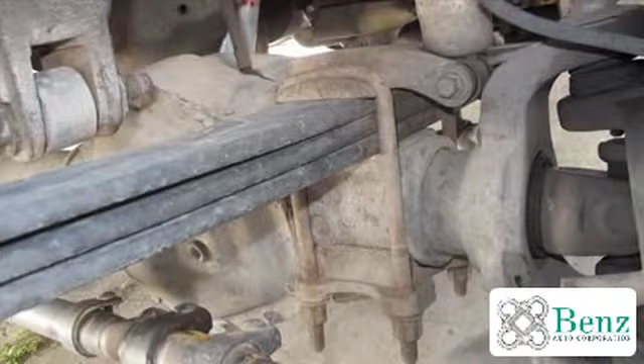Let's put some emphasis on the humble U-bolt, a very important part of the suspension, because if you have a leaf spring suspension, the U-bolts hold your leaf springs onto the differential of your vehicle, and your differential houses the axles which your wheels are bolted to, and they're good mates for tyres, hold you to the road.

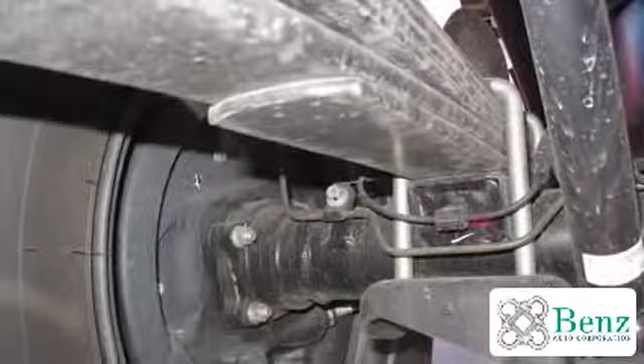Important, aren't they? But when spring repair or replacement is necessary, some people give U-bolts little thought because they are planning to save $1 and just use the old ones, which sounds like a plan until the old U-bolts are seized on and have to be cut off when removing the springs for repairs or replacement.

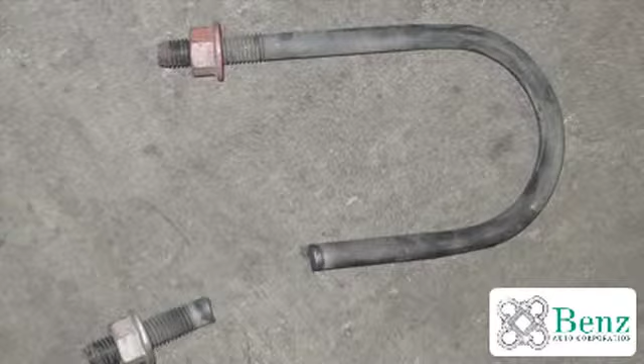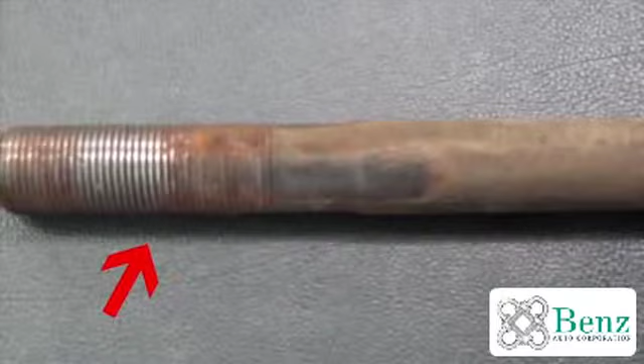The old U-bolts break or snap under the force used to undo the nuts, or the U-bolt threads are damaged when the nuts are removed, and if reused, keeping the nut tight after reassembling cannot be guaranteed, and loose U-bolts will void a new spring warranty.

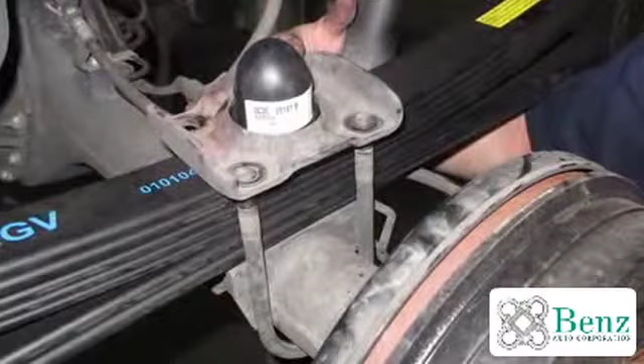Or, oops, forgot that the stronger and therefore thicker leaf spring pack is now being used, so my old U-bolts aren't long enough. Rest assured your disappointment will be amplified if you are doing the job on the weekend when everything is closed, or if you are a long way from the supplier. So to avoid being disappointed by any of these possibilities, let's just say it is a wise practice to replace the U-bolts when a spring removal or replacement has been done.

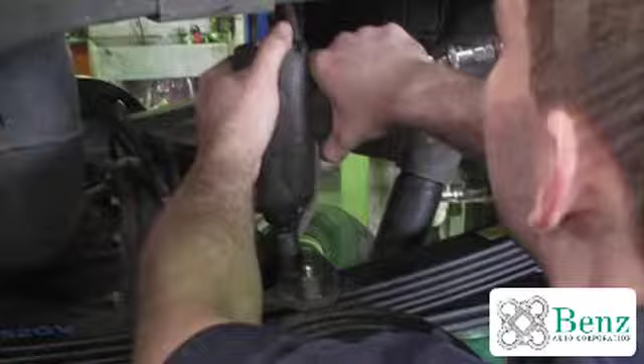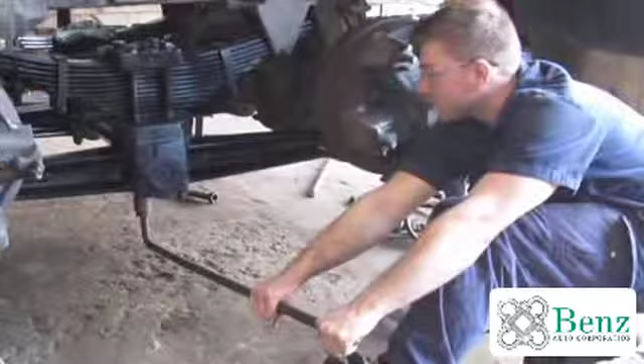It is also recommended that the U-bolts be retensioned 7 to 10 days after installation, as the spring settles into position and any initial stretching of the U-bolt threads has occurred. The retension will ensure the leaf spring remains firmly secured and is not allowed to rock in place, causing unwanted spring flex in the middle of the spring, which can cause leaf breakages to occur.

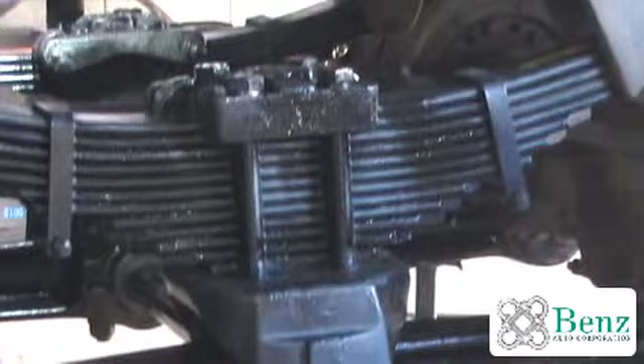Loose U-bolts can also cause a leaf spring to walk out of position, which will damage your centre bolt and affect the alignment of the vehicle. Remember, centre bolts hold the spring together for assembly and help locate the spring onto the axle in the correct position. Correctly tightened U-bolts are what holds the spring firmly in place on the vehicle when driving.

So now that you know why you need to replace the U-bolts, let's have a look at what we need to know about the U-bolt when we are ordering new ones. Most times just supplying the vehicle make, model and year will be enough. Other times the vehicle or spring specifications have changed and you need to describe the physical properties of the U-bolt.

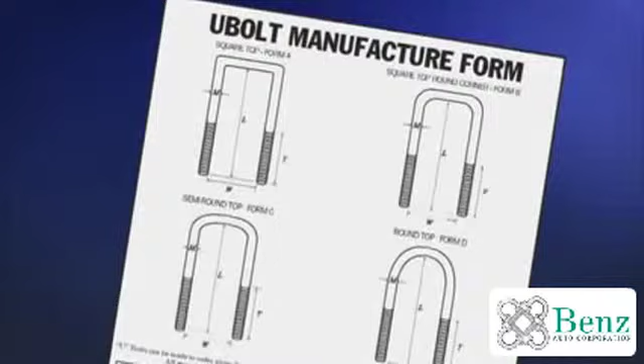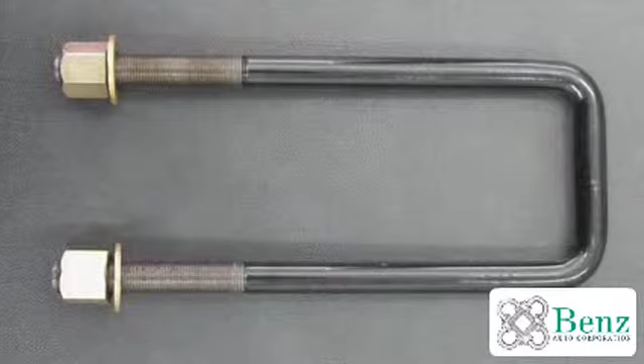So let's get started. What shape is the U-bolt? The middle of the U-bolt will be formed to go over or under the differential or the mount plate, and it will most times be one of a few basic shapes: square, round, or semi-round. Pay particular attention to the difference between round and semi-round. Seen together, it is much easier to tell the difference. See that the round one is almost a perfect semicircle shape, whilst the semi-round one has only a slight arch.

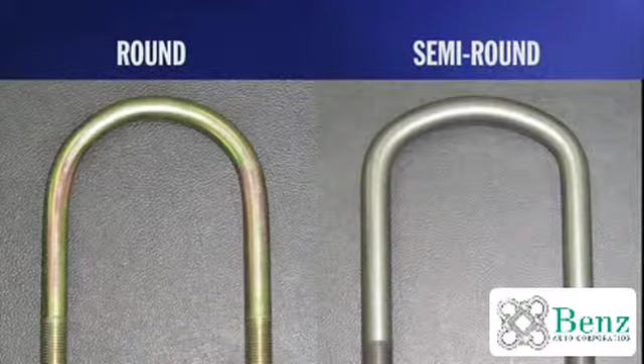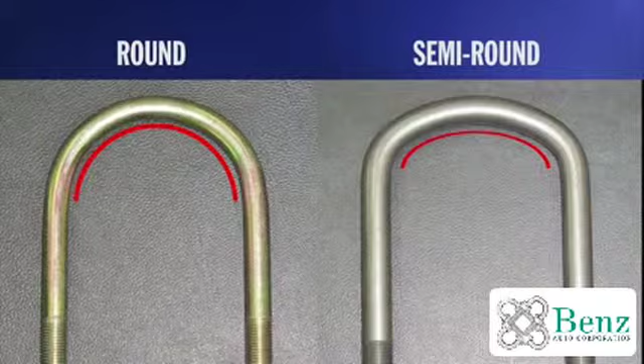Further variety exists still if the shape has been forged from round material to be flat, so we then have square forged, round forged, or semi-round forged. There are also some semi-round designs that are vehicle make, model specific, and special dies are required to achieve these shapes, but they are not so common.

What size material has been used? The material used to make the U-bolt will be round because the end of the U-bolt needs to have a nut thread on it.

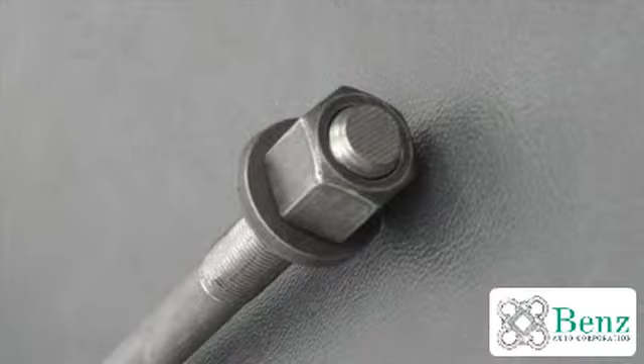Clever, ain't it? So when you are asked what material, you will need to measure the diameter of the rod, not the thread. This is because most U-bolt threads are rolled, not cut, and the rolling process will make the thread measure as a bigger diameter than the rod itself. And if you need nuts to suit, measure the thread size, not simply the rod size.

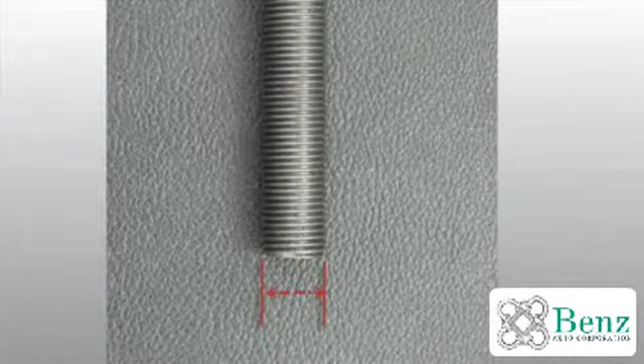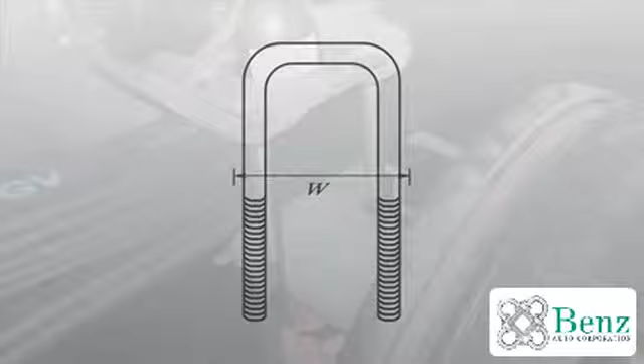What is the inside measurement of the U-bolt? This measurement is critical because it must be the correct width to go over the diff housing or spring pack. Too narrow obviously won't fit on, and too wide won't secure the spring correctly, or fit into the holes of the spring mount, cradle or plate. Measure from the inside of one U-bolt leg across to the other. Always measure at the shaped end of the U-bolt, as the legs of the U-bolt may spread during removal and give you a larger and incorrect reading.

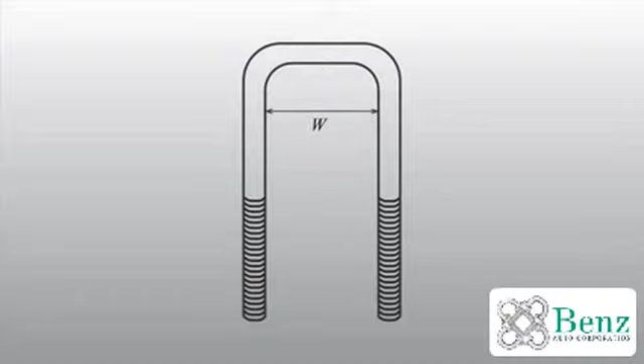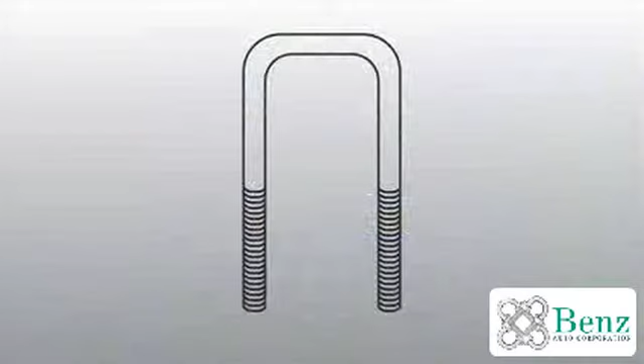What length are the legs of the U-bolt? When measuring the leg length of your U-bolt, always measure from the underside of the material at the top down to the end of the leg. Now don't forget that this is the measurement of the U-bolt you have now, and you may need to order longer ones if you are adding a packer plate or extra leaf to your spring to add height or strength.

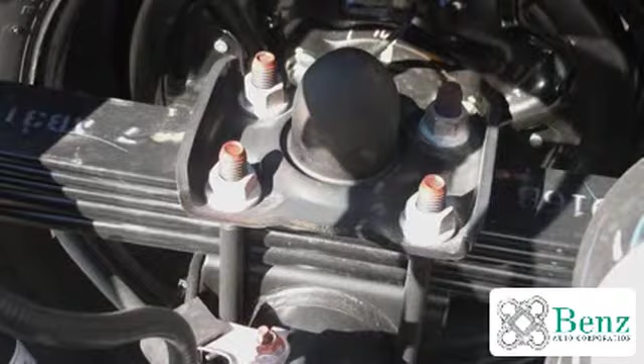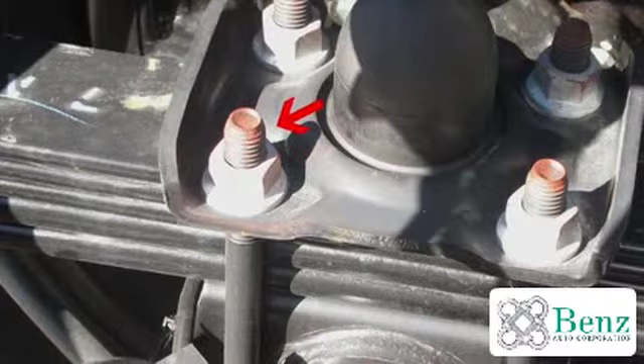It's a good tip to have a peek how much thread is sticking out of your original U-bolts before you take them off, so you know if your new ones will need to be longer once you have done your additions. Remember that you must have a full nut plus 2 threads extra on the thread of your U-bolt exposed after the nut. Any less and the nuts could work loose. And if you do replace your U-bolts, give them a retighten approximately 7 days after to make sure any initial settling of the spring and U-bolts has occurred. U-bolts must be tight or problems will occur.

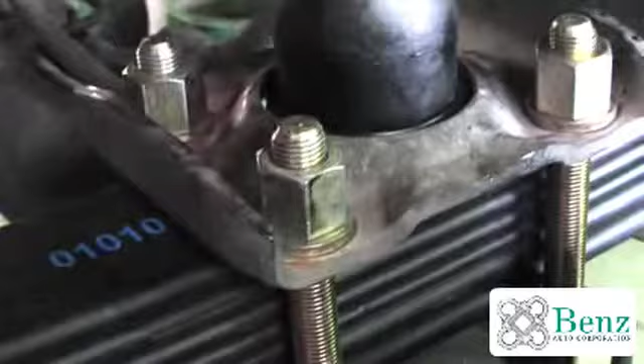How much thread does your U-bolt have on each leg? Most of the time the length of the thread is relevant to the length of the leg, with plenty to spare, but if you ask for it, know where to measure. What grade material should the U-bolts be made of? This is not normally something you'll need to stipulate. Usually the supplier will know relevant to material size what the standard requirement is. Some of the smaller 2-wheel drive and 4-wheel drive U-bolts are equivalent to grade 5, whereas the big heavy U-bolts are supplied as grade 8.

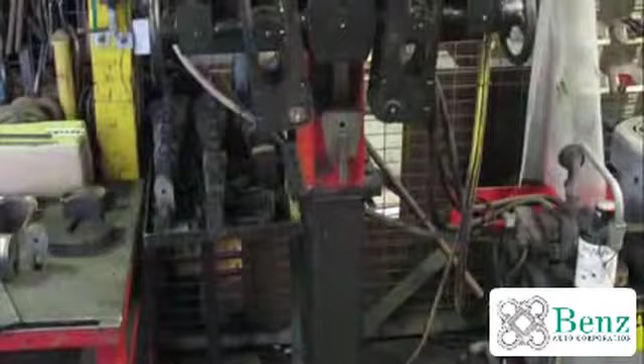What if the U-bolts I need aren't available off the shelf? Many suspension suppliers and installers have a U-bolt bending machine on site. With the use of one of these machines, a U-bolt blank can be selected considering the material size, width and length you need, and bent to the shape or form stipulated for the top of the U-bolt. It is then a case of selecting the right die to form the shape needed to make your U-bolt.

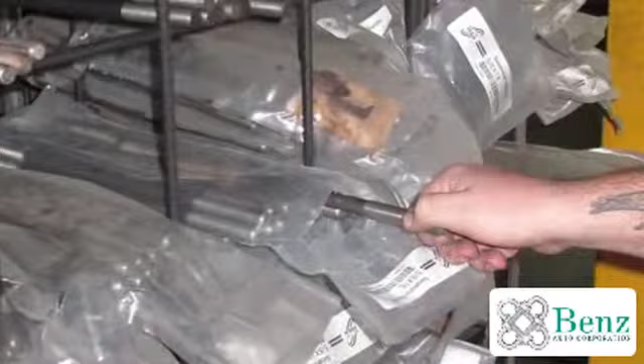Individual machines will have limitations on the diameter of rod they can bend. Please remember that threaded rod blanks are a cold bend steel material, and it is a definite no-no to use heat on the threaded rod blank to help with the bend. Using heat can cause a reduction in strength or failure of the U-bolt.

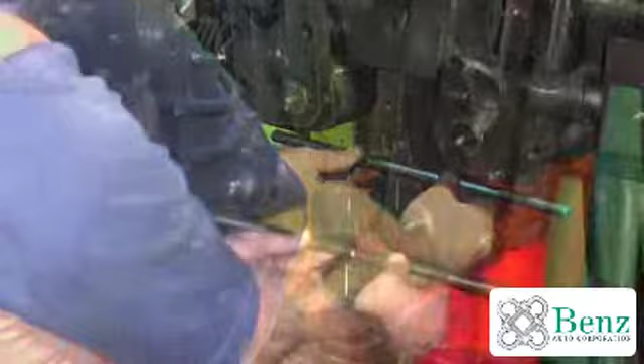Well, hopefully that tells you enough so you can talk U-bolt language when asked, and you can order your U-bolts without too much difficulty.